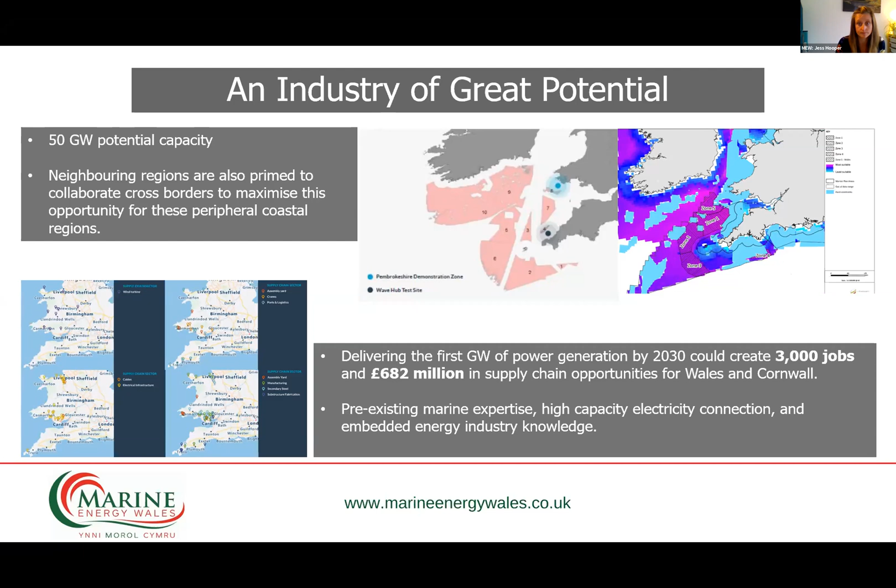To this end, a number of activities are underway to support this burgeoning industry. In October 2019, Wales's Minister for Environment, Energy and Rural Affairs, Lesley Griffiths, launched the Celtic Sea Alliance in Dublin, which brings together key Irish, Cornish and Welsh interests in the sector. Ourselves, Marine Energy Wales, Cornwall and the Isles of Scilly Local Enterprise Partnership, and Marine Renewable Industry Association Ireland, together with a number of developer interests in the Celtic Sea, meet monthly to identify ways in which we can facilitate the sector's progress.

This strategic collaboration strives to increase the awareness of the Celtic Sea opportunity, highlighting the benefits of regional cooperation and facilitating mutually beneficial participation in projects in the Celtic Sea. It also seeks to bring the nations of Wales and Ireland and the Great South West region together to identify potential barriers to the industry and find solutions for overcoming them to the benefit of these Celtic regions.

This is further supported by the Celtic Sea Offshore Floating Wind Cluster. This industrial cluster formalises a partnership between the regions of Cornwall and Wales. MEW's participation in the cluster facilitates a cohesive approach, sharing our knowledge and experiences of the sector here in Wales, and alongside ORE Catapult's technical expertise and regional presence, further strengthens the collaboration cross borders. The cluster seeks to support many of the aims of the Celtic Sea Alliance through the delivery of practical solutions and engagement activities.

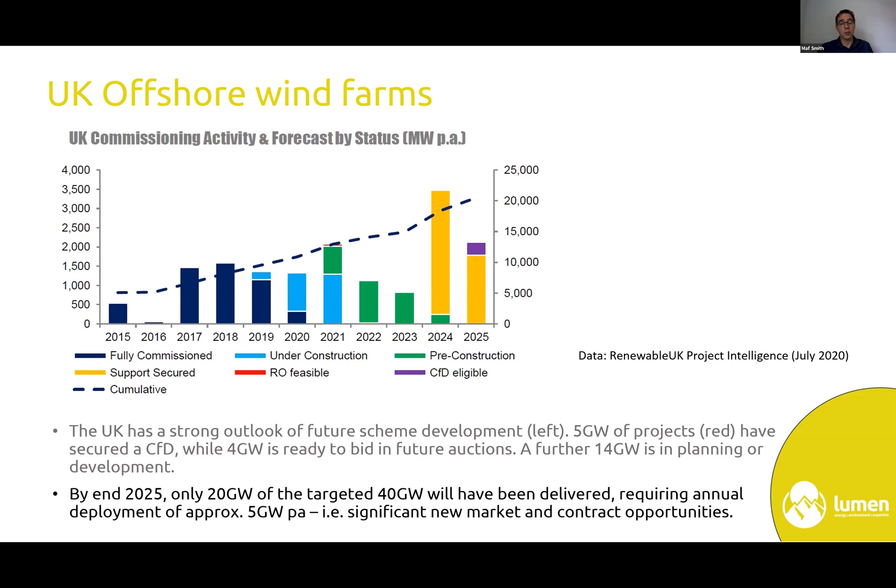Over a couple of year program of engagement with government at different levels, we were able to make it understand and realize this wider opportunity, and hence get that support. So we're at the start of something really interesting. There's a lot of activity in the market, but we'll see a lot more to come, and I'll touch on some of that later, as well as talking about some of the global perspectives.

So current status, that graph I've just showed you, this shows you it as a pie chart. Again, it shows you the amount of wind at different stages. Almost all of this, again, is fixed.

On your right, you can see the map of the Celtic Seas. There's a lot of floating offshore wind potential there. As Jess said in her presentation, estimates for up to 50 gigawatts of floating offshore wind. But that small circle drawn on that map, that is the pie chart as currently exists for floating offshore wind, roughly by scale. Actually, it's probably not quite to scale. It's probably bigger than it should be.

But when I tried to scale it, it disappeared from the computer screen. So that small circle is a pie chart, showing you the relative scale of fixed versus floating at the moment. So we need to think in proportions. But it won't stay that way for long.

Particularly because of ScotWind, as much and as well as the prospecting activities that we're seeing in the southwest, the activities we're seeing in Ireland, a lot of work now going on, and we expect more and more projects to come forward very quickly.

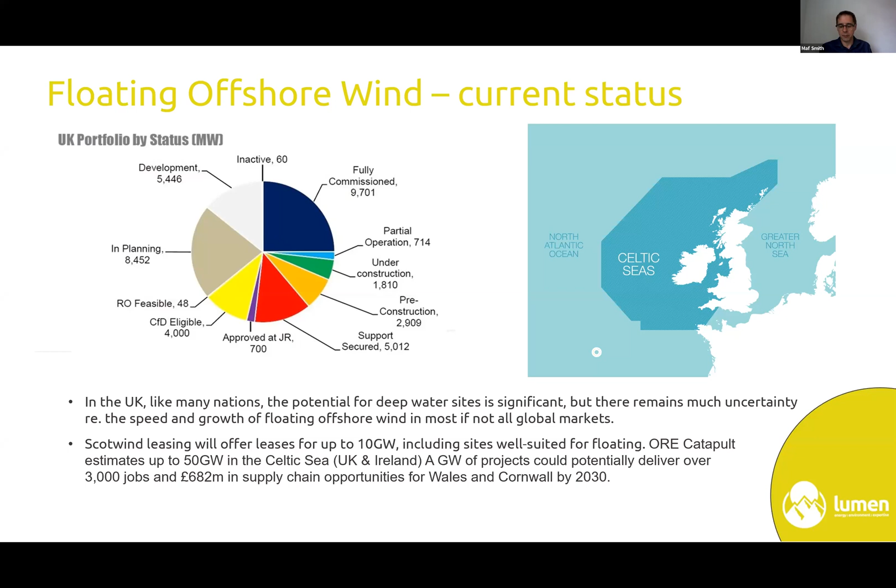That small circle shows you it in terms of the known projects. This is again from Renewable UK data. It tracks known projects, so there are plans for a wider portfolio, but this relies essentially upon initial development activity starting. So we have the Hywind Scotland scheme operational, Kincardine, the first turbine operational, and the second phase being built, and then the Erebus project underway, which you're going to hear a lot about later from David and Christoph.

But we will see, assuming that the changes being proposed by the CFD to have an auction round focused on innovative technologies, create a third pot that offshore wind, the fixed offshore wind, moves into, so that can continue to be supported at scale.

That, and the leasing processes and other political and policy work that's going on, will support floating offshore wind and help it come forwards, dependent of course on small things like what price will the auction run at, what will the rules of the auction be. A lot to do to make sure that's a viable system, but a good start, and of course a commitment from the Prime Minister down that the UK government sees a role for floating, and that's worth holding on to.

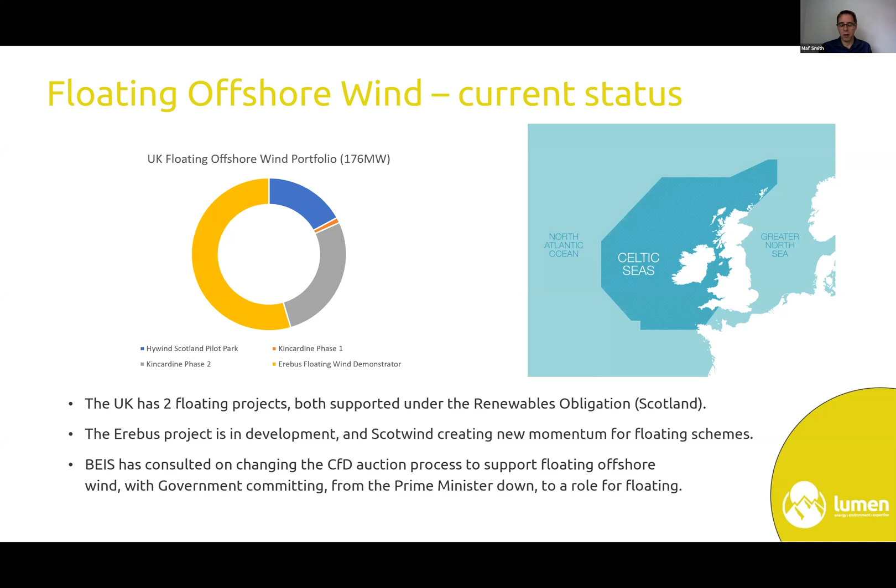If we look at the global pipeline just briefly, this shows you a pipeline of offshore wind farms, both in operation, construction, consented in planning, and development. Clearly most of the floating offshore wind schemes, not unexpectedly, are in the development phase. That shows you a rapid upscaling of new projects coming in around the market. Still small compared to the growth of fixed globally, but expected to grow.

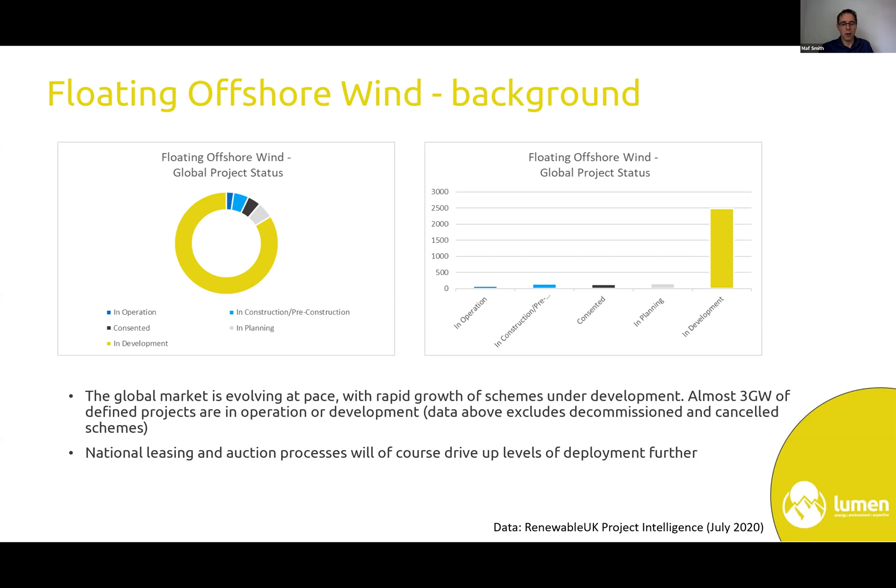The national policies and changes will be important in trying to drive those different markets forwards, and obviously the pace at which those different markets will go forwards. We have markets with high potential, but sufficient fixed capacity, that those markets are saying publicly they'll focus on fixed at the moment until either technology prices fall or there begin to be constraints.

And you can see, if you like, similarity to how that has worked in the UK market.

Briefly, foundation type: it's important to understand there's a lot of work being done on foundation types. There are many different variants in the market. There are clear leaders in the market, though, of course, and equally, if you look at the data, such as it is, the market clearly prefers the semi-submersibles, and the projects are moving ahead on the back of those. But even going out, so future planning schemes, you can see still interest in advanced spar, for example.

So we can expect to see continued diversity in this market. There's a lot of learning still to be done from these early stage projects, and of course different sea conditions, different construction options, which will suit different platform technology.

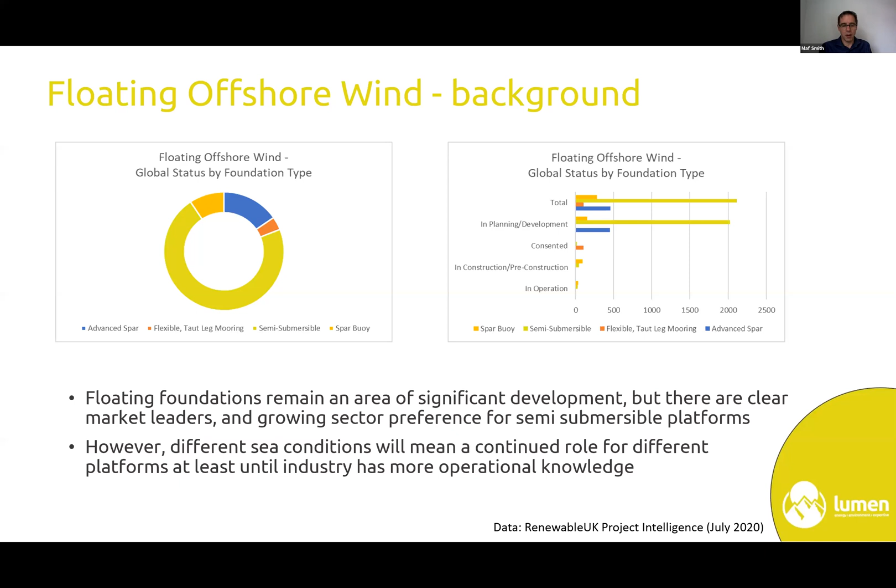In terms of the markets, the biggest market, by far, by defined projects, is South Korea, followed by France. Now, that doesn't necessarily mean that those are the largest markets, because a lot depends on timescale. It depends on the revenue and market mechanisms that could support those schemes to come forwards. Essentially, come off the drawing board or come off the development plan into construction.

But you can see a range of countries in that market. Saudi Arabia, of course, has a very large scheme that's being planned. Italy, a large scheme in the Med being planned. So many of these schemes have questions over them in terms of how they will be funded, the path to market and route to commercialization for those developers, but no shortage of appetite now emerging.

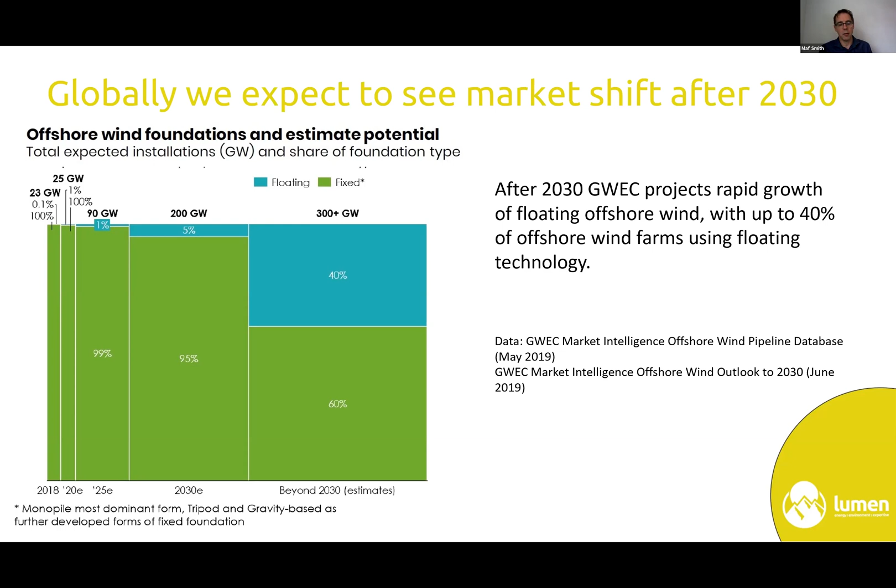And indeed, if you look at GWEC's own estimates, this is their forecast out to post 2030. So you can see on the left there, 2018 current, 2020, 2025 to 2030. So by 2030, they expect 5% of the market to be using floating platforms, but post 2030 to grow to up to 40%. So a significant change as the floating market commercializes, as the costs fall, as some markets, such as the UK, for example, come across constraints in fixed. That means we're prepared to go further out, either for better wind regimes or to avoid issues such as constraints or cumulative impact.

South Wales, of course, this is a capture from the excellent State of the Sector report that Jess highlighted at the start. There's a lot happening in South Wales. There's a lot of activity in terms of thinking about how we can utilize that expertise, utilize that resource. There's a lot of discussions. I'm personally involved in discussions, for example, about energy transition around Milford Haven, around the utilization of the Pembrokeshire demonstration zone.

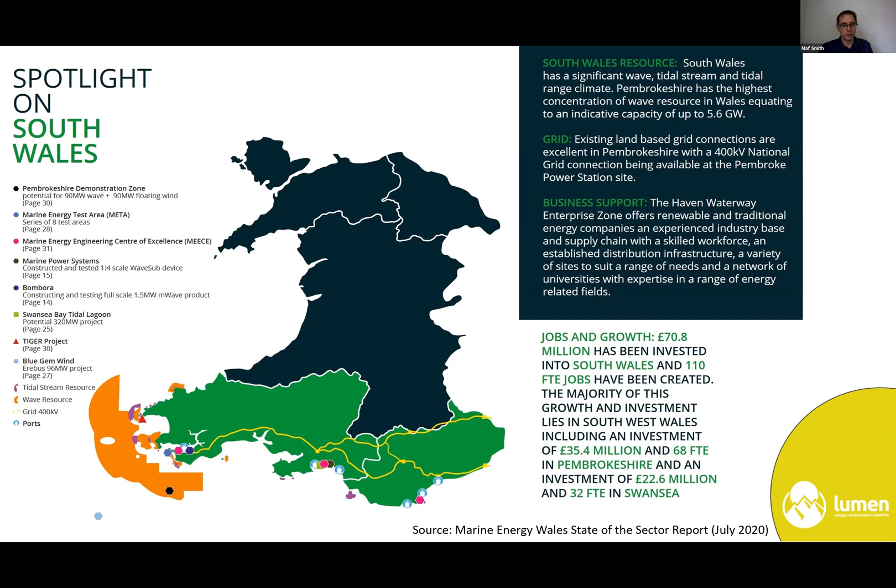Initiatives like the South Wales Industrial Cluster and the hydrogen route mapping that's going on obviously can play a part and help to embed expertise, help the manufacturing sector in South Wales stay viable, stay low carbon, or become low carbon, and help transition in the gas sector that's obviously so important around the Milford Haven Basin. And there is already a supply chain ready that can grow, and that shows you an excerpt from the Renewable UK's supply chain map showing you companies winning work already in the offshore wind space.

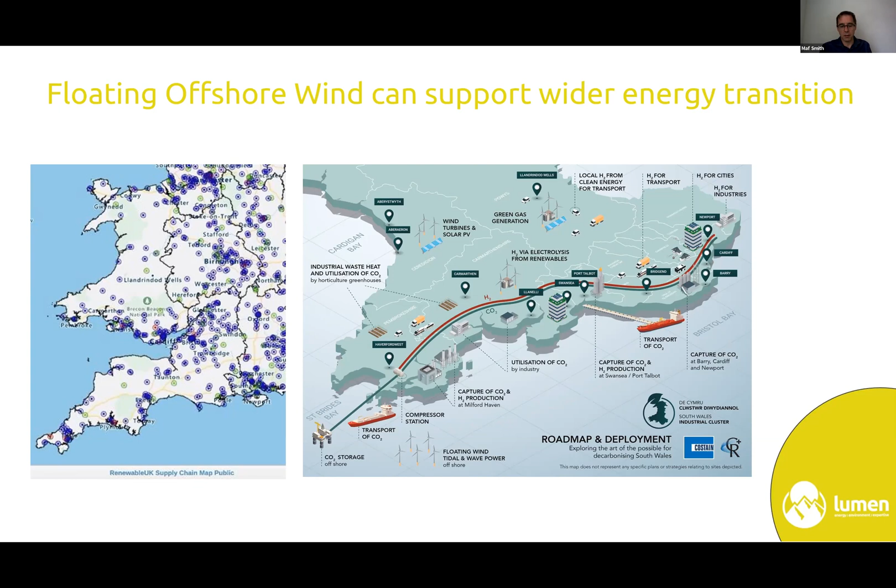So that's all from me. I hope that's a helpful intro and setting the scene ahead of what I hope is going to be a varied, interesting debate and a set of presentations I'm very much looking forward to. So Martin, thank you, and back to you.

Matt, thank you very much indeed for that insight, not only local but global, in terms of opportunity which floating offshore wind presents. Now, of course, our industry, this growing industry, has attracted a lot of interest, and Carbon Trust, as a highly esteemed organisation in the renewable energy space, have done much work themselves. And I'm delighted to welcome Megan Smith from the Carbon Trust now to give us a summary of some of the work that's been done by Carbon Trust and which has been recently published. So Megan, over to you, please.

Thank you very much. Can you all hear me and see my slides? Yes, we can. Thank you.

Great, thank you. So yes, my name is Megan Smith. I head up the Offshore Wind Advisory team here at Carbon Trust. And thanks for giving us this opportunity to talk through one of the pieces of work we've recently published. So for those of you who don't know the Carbon Trust, we've been working in offshore wind for well over 10 years now, and we mainly work with government and industry to accelerate and further develop offshore wind.

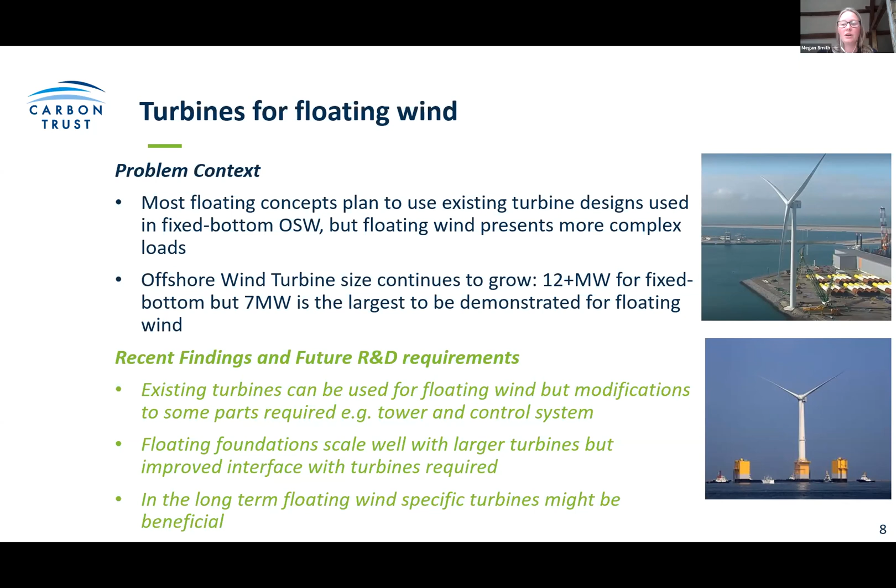So the second project was looking at heavy lift operations. So when you're installing or maintaining, for that matter, floating turbines offshore, you need very, very big boats and very big cranes, essentially. And we don't have many of those on the market at the moment. And what we do have on the market is very expensive to hire and operate. So that's a key barrier for developing floating wind on a commercial scale. If we don't have the boats to install these things, we can't scale it up.

So we need to develop these heavy lift vessels with motion compensation and bring those to market, really. This project also looked at new solutions, like climbing cranes, and concluded that these do offer potential, but we need to make sure these are demonstrated accordingly, because this is doing things in a very different way to how we've done it traditionally.

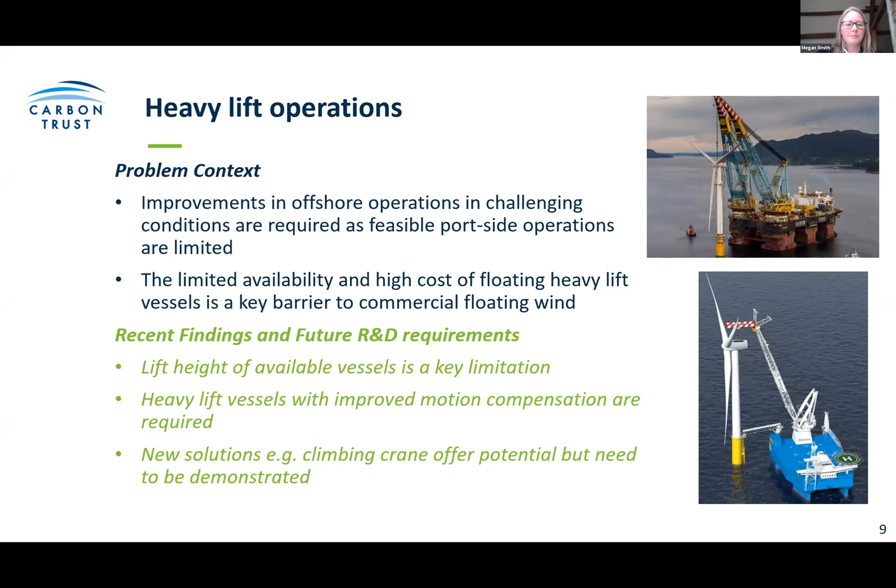So the third project of the 4 is looking at monitoring and inspection. So with any new technology, there are new risks. The natural thing is to compare fixed and floating. With fixed wind, we've had projects in the water for decades now. We know where these projects are likely to fail. We know where the turbines are likely to fail. We know how to look out for it. We know what the risks are. We don't have that kind of knowledge and insight with floating. So that massively increases the risk of this technology.

So understanding the risks and understanding how best to monitor for these failures is really important. And what we found was that there's no quick win solutions, and that unfortunately remote monitoring, where we don't actually have to go out in person or send divers underwater, is quite limited for mooring lines, and therefore monitoring devices for mooring systems are in need of further development.

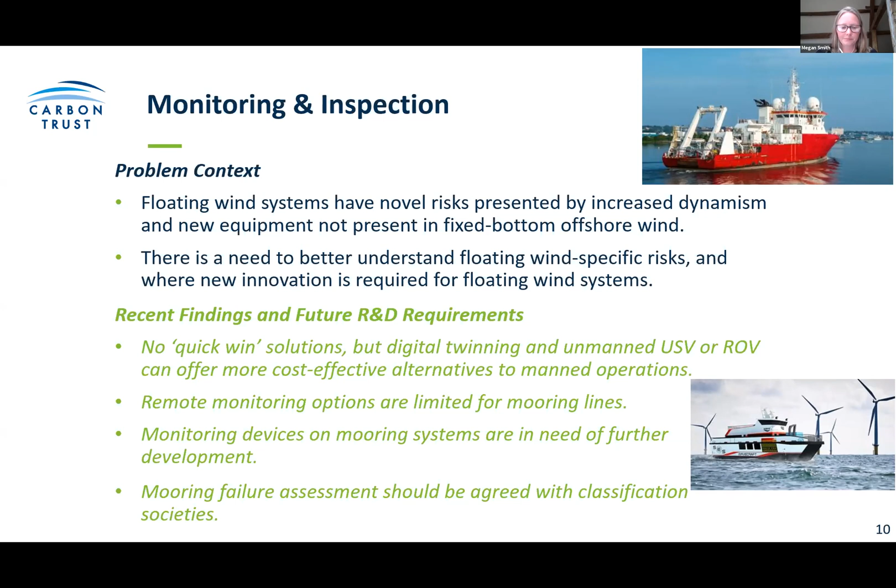And then finally, the final project that I'm going to go through today is looking at dynamic export cable development. So again, in fixed wind, generally you have the export cables nicely buried under a couple of meters of rock or mud or sand, and they're quite safe under there, generally speaking. In floating wind, you don't necessarily have that. Obviously, they're coming down from a floating platform potentially, and therefore need to be able to manage the loads that are associated with that sort of dynamic cable.

So as a result of that, they're likely to be heavier, stiffer, larger in diameter, and have larger minimum bend radii. So you can't coil them onto a drum as easily. Which means that actually installing them offshore, there's extra challenges with that. So understanding what those risks are likely to be is key. We don't have high voltage dynamic cables on the market at the moment. We have medium voltage cables.

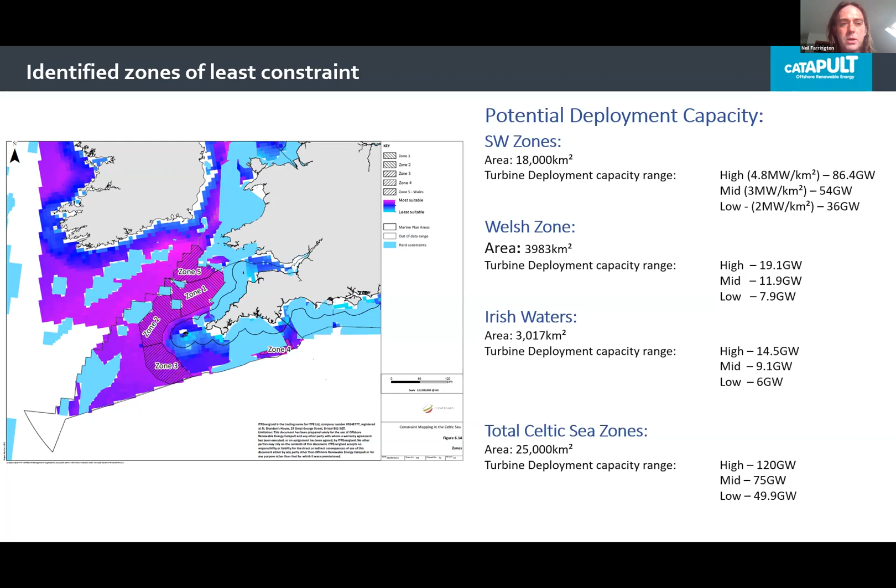I'm just now going to quickly jump onto the Welsh zone, to give you a bit more context there, a bit more understanding around that area. So the Welsh zone is zone 5. Effectively, it's bounded on the north side by the EEZ limit and bounded on the east side by an SPA. Again, there are potential opportunities to expand this zone, but it gives us somewhere to start from initially. So that area is looking at nearly 4,000 kilometres squared. So again, a significant space.

We're looking at average wind speeds between 10 and 12 metres per second. So that's slightly above average for what we would see for the whole of the Celtic Sea, which would be about 9.5 metres per second. And another point to pick out there, based on the current data that's available and modelling that's been done, we can only project at 100 metres. So one of the future actions here would be to take some of the funding we'll hopefully have by the end of the year and potentially look at floating LiDAR deployments. So we can not only get more consistent detailed data, but we can get it at the right likely hub height, which is obviously useful for understanding the potential, but also for supporting this sort of pre-consenting process.

Significant wave height is good. So generally we're looking at a 2.5 metre significant wave height limit in terms of access, although there's also economic issues here in terms of loading on turbines and different structures. So again, a few considerations there, but as it would currently stand, no issues in terms of accessing that zone for O&M, for example.

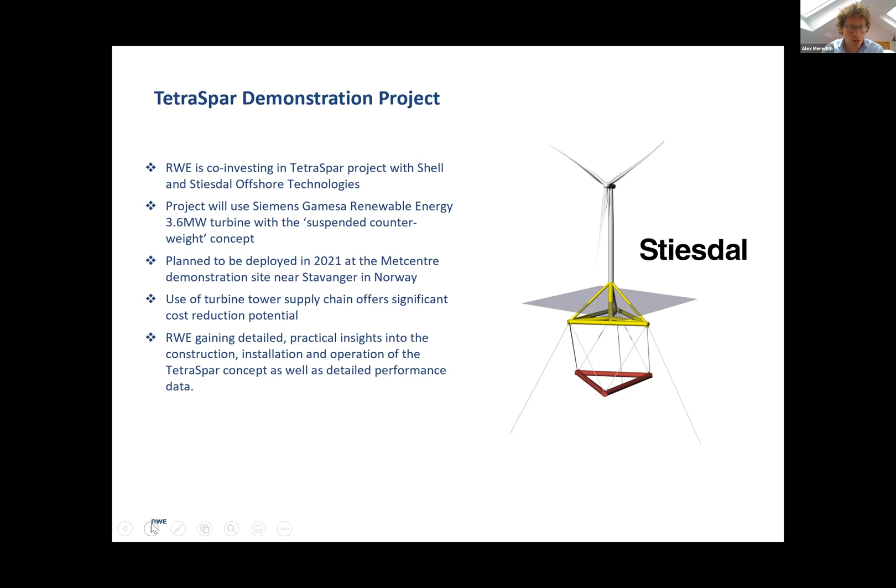Moving on to the second project that we're doing, and this one is actually a legacy innogy project. So I come from the innogy side of the business, and these two have come together. And again, this one is a concrete hull design, so it's different, obviously, to TetraSpar. It doesn't sit so low in the water, and it's a barge technology that is one of the four main types of technology that we're seeing developed in the market. I'm sure others will have more insights into the other types, but we're looking at this barge opportunity.

It's being tested in Spain, and it will be giving us insights hopefully as to where we might look at slightly shallower depths potentially, because it doesn't have the deeper keel, or doesn't have a keel at all, and we're looking forward to getting the insights from that as it runs its test, which starts in 2022.

So what does that mean for Wales? We see three challenges. I suppose it's important to say we're technology agnostic. We're waiting to develop these tests and to see what the results show, and then seeing which sites are potentially the most attractive for which technologies, and moving forward on that basis. And Wales we think is a real opportunity, as I said at the start, but it has three potential challenges. The first is leasing.

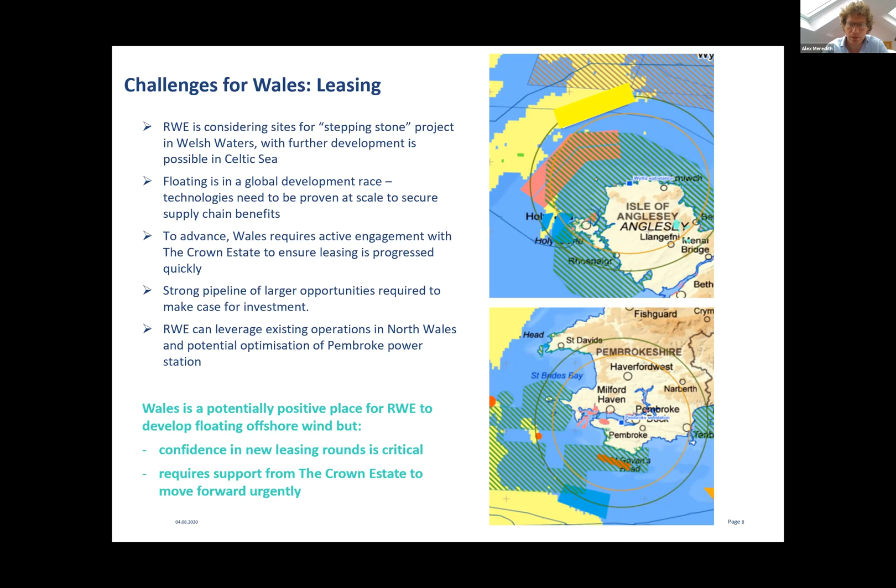Secondly, grid connection in Wales is problematic. Anyone who works in renewables of any type will know this story. But to deliver the sort of capacities just mentioned, it's just not achievable with the current grid infrastructure. Wales needs to be rewired completely. That includes distribution level, community level, where we need decarbonisation of heat and transport. There's an enormous challenge to bring the right sort of grid to people's homes. But for generators and developers like us, even capacity at the transmission level is not available for the sort of projects being foreseen at gigawatt scale. This will be compounded by potentially round 4 leasing in North Wales, which would add more capacity to the grid in that area.

But even in South Wales - I'll put the diagram here - you see voltage constraints and other constraints around the network which are not going to be resolved in the short term. We've talked a lot to Welsh government and UK government about this, but it's absolutely critical that we see investment in the grid network to allow for development off South Wales and North Wales, South Wales in particular. If this story is to really come true, there needs to be connection points made available. That's complicated by the role of Ofgem, UK government, and non-devolved issues. But we need to find solutions here and start making that investment now.

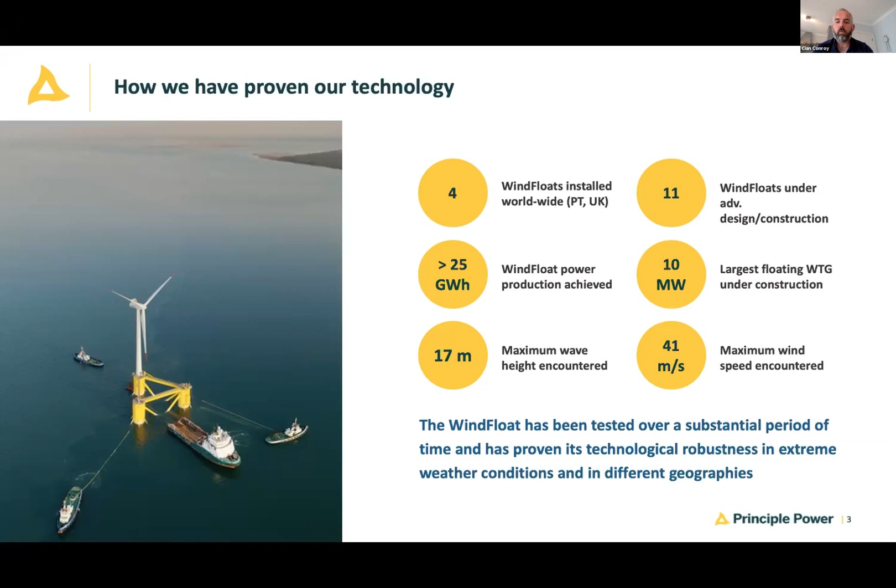Our units have been deployed and survived perfectly in 17 meter wave swells, and the maximum wind we've encountered is 41 meters per second. So we've come to the conclusion after that list that it's gone through the demonstration phase and we're now working towards commercial projects, and that's really the key piece.

In terms of the WindFloat itself, just some of the key attributes of it. What we see here is our WindFloat 1, which was our demonstration project. The WindFloat has a relatively shallow draft. As a semi-submersible, this enables a number of key advantages. It can be deployed from relatively shallow ports. It doesn't need fjords as other devices might. It can be towed back to shore and maintained in relatively shallow ports. The structure itself is its own installation vessel. It's inherently stable in transit, so it's towed there by a standard tug.

We use standard quayside assembly and commissioning. So again, this allows us to use infrastructure that exists. We don't need to tailor it. So we can use shipyards and harbours. The platform itself is turbine agnostic. We've always taken the decision that the choice of turbine will be made by the site developer rather than by the platform developer. So we've had certification in principle from the 3 leading OEMs. We've also been certified for downwind turbines for projects in Japan. So we really see that as being a decision by the customer.

So to go back to Megan's point, we do interface with the turbines, but on the turbine control, we don't require too much input from the turbine. We rely on the SCADA data to tell us what the turbine is doing, and the platform responds in kind. We don't control the turbine itself. The system itself provides a number of other advantages in terms of its stability. So we get to use low pre-tension conventional moorings. So projects to date use catenary mooring spreads with a drag embedment anchor.

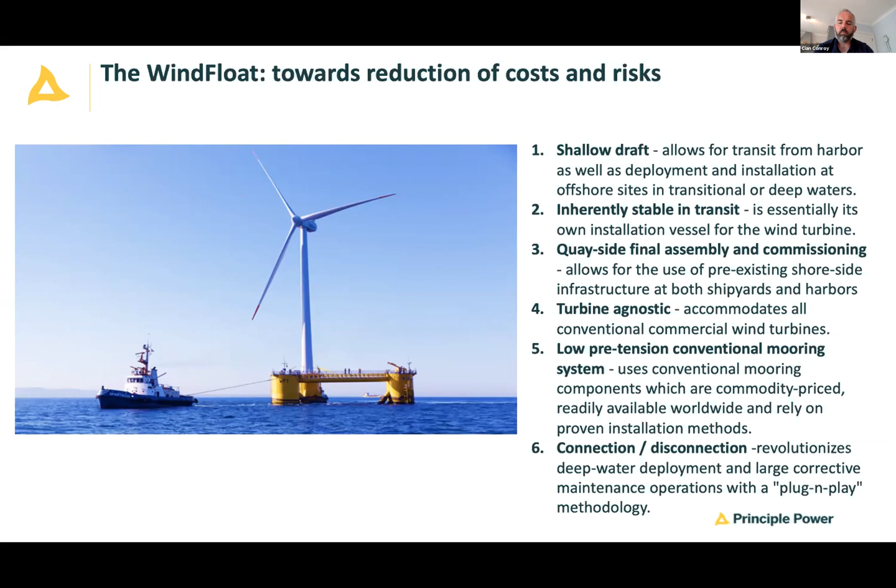Very often people refer to this as an active ballast system, but I think in reality it's the trim system. So when we saw in our first deployed unit, on an average basis, the pumps themselves are only running for between 45 minutes and an hour in a 24-hour period. So it's not operating in a dynamic response to the turbine.

The second feature we have here is our static water ballast. So these are the ballast tanks to achieve operational draft. This enables us to use greater flexibility in our marine operations. So we can adjust the ballast during the commissioning at quayside. We can then enable different ballasts for towing, and then a final to achieve our operational ballast at the installed port. We've seen examples of where adjusting the draft is key.

Our project in Scotland, we commissioned in Dundee. We had to overcome a sandbank at the entrance to the Tay, so we adjusted our towing ballast using the static water ballast and the use of ballast bags themselves to raise our operational draft for towing to port. As I mentioned already, the platform itself is turbine agnostic, so we can work with any of the turbines themselves.

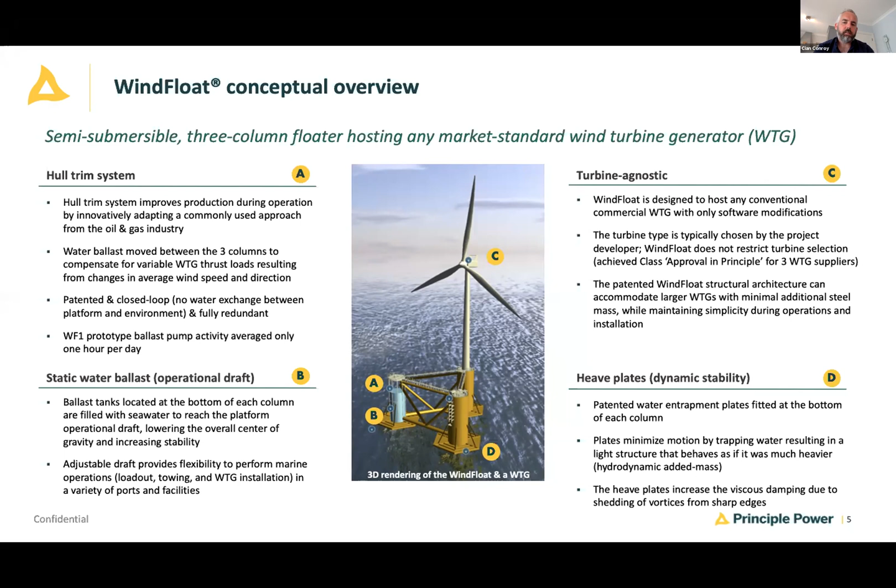And then finally is the heave plates. So these are what's very often referred to as water entrapment plates. These are a crucial and patented element of the WindFloat itself. And what they're really using there is the viscous damping of the water. So in response to the thrust on the turbine, the damping effect itself is providing the stability for the platform. So these 3 elements together enable us to use the low tension spread on the moorings, which then has other impacts on ROV usage for hookups and connection and so on.

So when we go towards commercial scale projects, the 3 key elements that we look at in terms of commercial projects is the survivability of the platform. Will it actually produce electricity for 25 years? Is it investable? And the industrialization approach to it. So I'll talk a small bit about each of those.

So in terms of survivability, you see our first WindFloat 1 deployed off the coast of Portugal. Here we see it surviving 17 meter swells during its operational life. So that was deployed from 2011 to 2016 for a 5-year EU demonstration project. In the bottom right, we see the power curve for the turbine. So the turbine used on that was a standard Vestas V80. And this graph shown is the production curve of a standard onshore V80 mapped against the production of the floating V80. So we see like for like that we're getting the same curve and no variation in that in the platform.

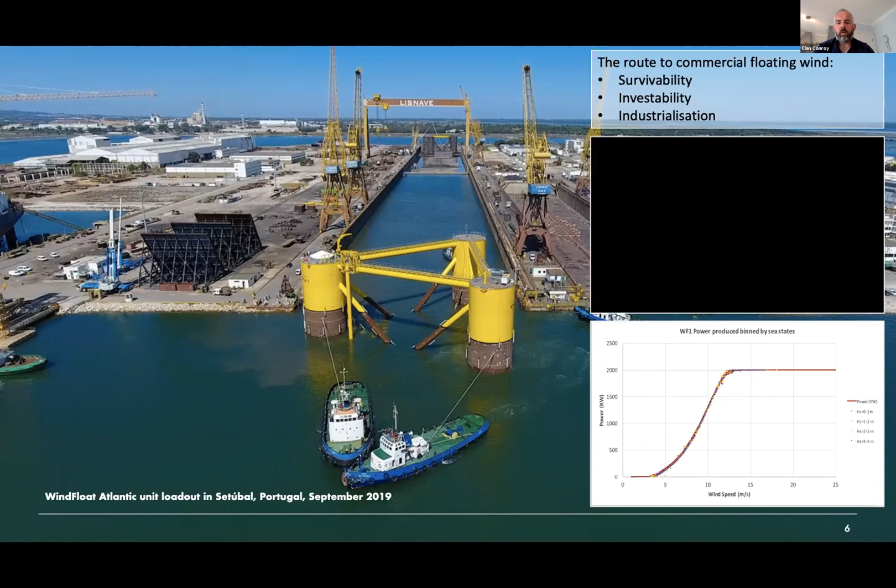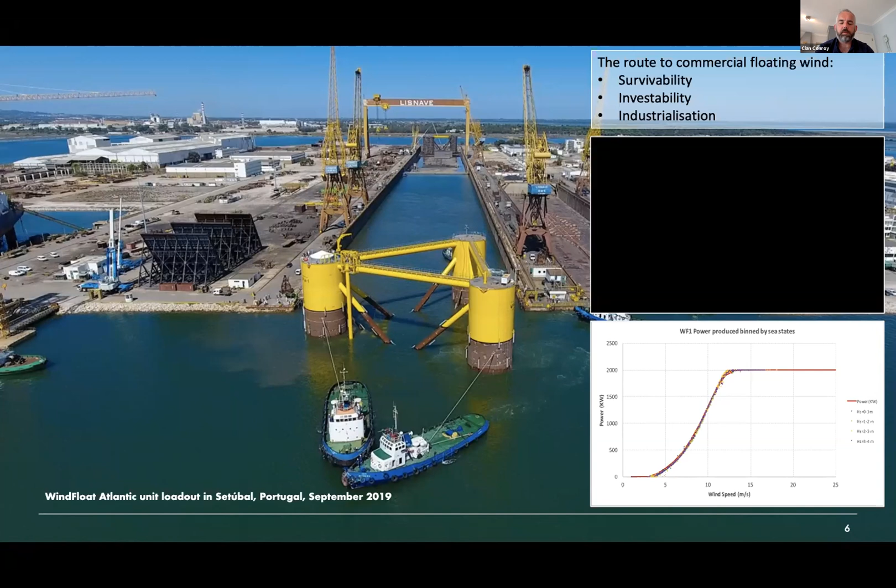And I suppose the third bit is industrialization. How do we ramp up demand? I think one of the questions earlier was talking about industrialization and the demand that would create. The WindFloat is designed to be fabricated in a number of environments, whether it's using dry docks, as we see here, or using quayside facilities. It can be adapted to be manufactured in multiple environments.

So briefly, WindFloat 1, this was our demonstration project. So we deployed this in 2011, just off the coast of Portugal. It was a 5-year EU-funded demonstration project. We used an off-the-shelf Vestas V80 with minimal interface with the turbine, no control requirements. We operated in 1-year return periods of 7 meters HS. As I said, intense storms of 17 meters.

And what was crucial in all of this was the project itself was a 5-year end-to-end project. So it was to prove the viability of off-site construction and commissioning, the tow to port, and crucially the operations and maintenance. So for the decommissioning of the project, we ran it as an O&M exercise, so that the turbine was returned to port to replicate and run a scenario for blade exchange, nacelle exchange, gearbox exchange, so we could prove the viability of these activities in a port location.

And quickly, I'll just touch on some of the key points. I think Matt referred to known projects in his breakdown of offshore projects globally. So I'll just very quickly talk through the projects that we have under contract.

I would caveat that there's far more projects cooking away in the background, and I think what we'll see in the next 5 to 6 years is more and more of these projects come out at various locations around the UK and the world, whether these be standalone floating projects or hybrid projects which are bolted onto existing fixed wind farms.

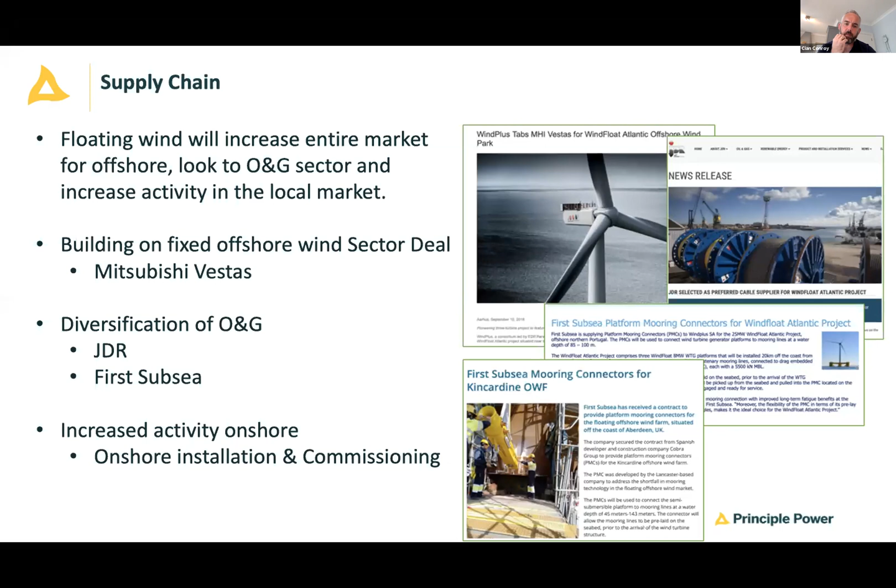So I rattled through that very quickly, just to get back on track, but I hope that adds a little bit of flavor to the projects and what we do.

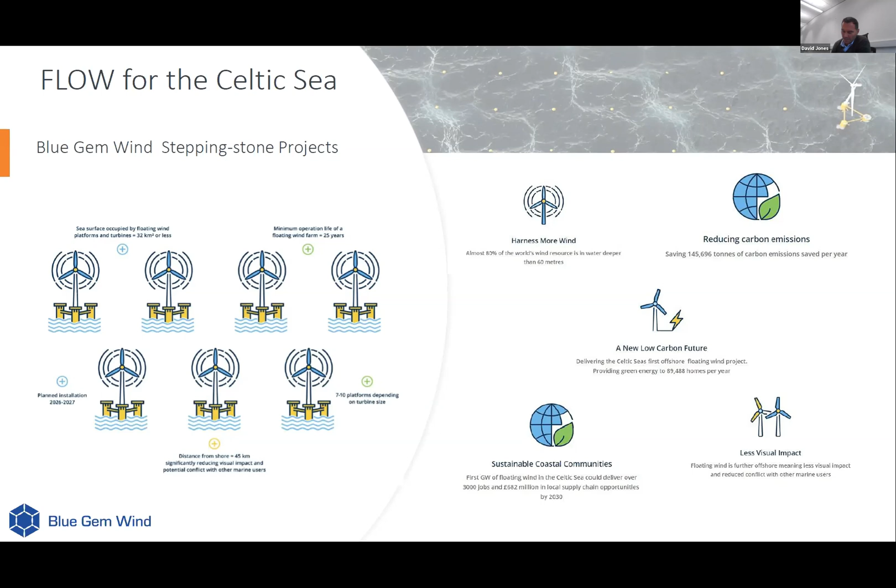And Erebus is delivering the Celtic Sea's first offshore floating wind project, reducing carbon emissions, providing green energy to 89,000 homes, and this whole sustainable coastal communities aspect is really important. And this is a figure that's been talked about briefly: the first gigawatt of floating wind in the Celtic Sea delivering over 3,000 jobs and almost 700 million in local supply chain opportunities by 2030, for Wales and the southwest. And as I mentioned, less visual impact as we move further offshore.

This is taken at beach level on probably a perfect day in Pembrokeshire, the best visibility you could possibly get. Fixed offshore wind has been really successful for North Wales, and more recently the northeast of England has benefited incredibly from its success. We absolutely need it for our low carbon targets. But if you look at Cambridge Economics suggestions out to 2032, the job creation is generally on the northeast coast, and we're not seeing that benefit in the southwest too much. So it's really important to extend those economic benefits, and the Celtic Sea will bring some energy system benefits as well.

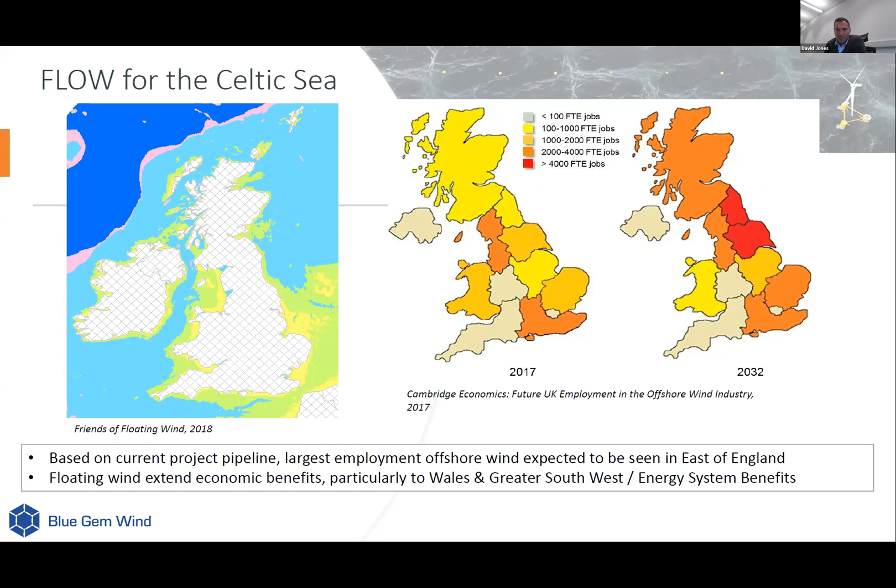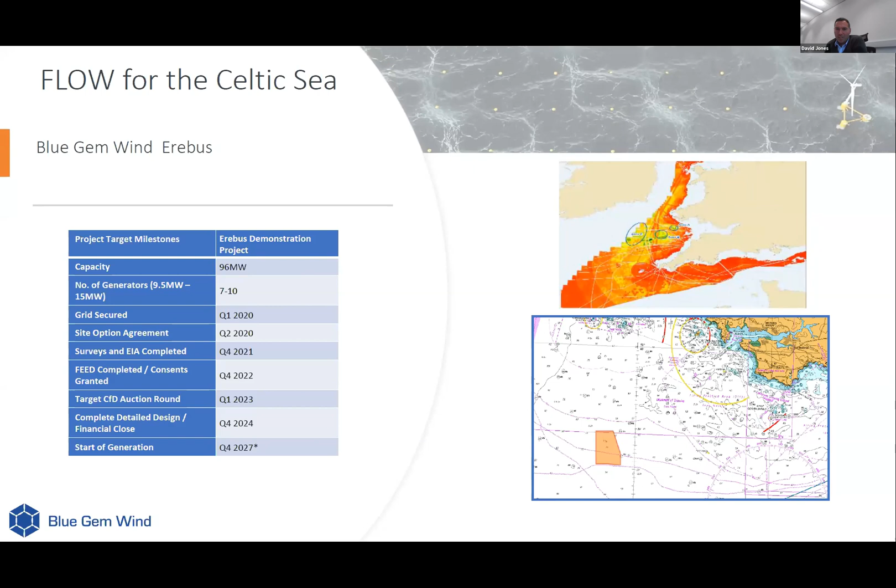A little bit more about the project. We have secured grid, and we're very close to a site option agreement from the Crown Estate, working closely with them. We'd expect an announcement in the next 4 weeks. We began survey work back in 2019, working to a 2021 EIA completion, and working hard towards the CFD auction round of 2023, with start of generation by 2027. That seems like a long time away on a slide, but we've got a very challenging program, incredibly busy, with a lot to do and lots of targets and milestones to hit.

An update from us - we're really working closely with the Celtic Sea Alliance, the Celtic Sea Cluster, MEW, and Cornwall bodies and development agencies in Cornwall as well. We've delivered a port study to build up engagement and understanding, but also stimulate upgrades. The ports have an absolutely critical role to play at a UK government level in terms of supply chain content. If we can nestle some opportunities within the ports around the UK, that will have a positive impact on the surrounding supply chains. Upgrades are really required at a UK government level, and it's really good news that Pembroke Dock Marine has been signed off, with finance available to do that.